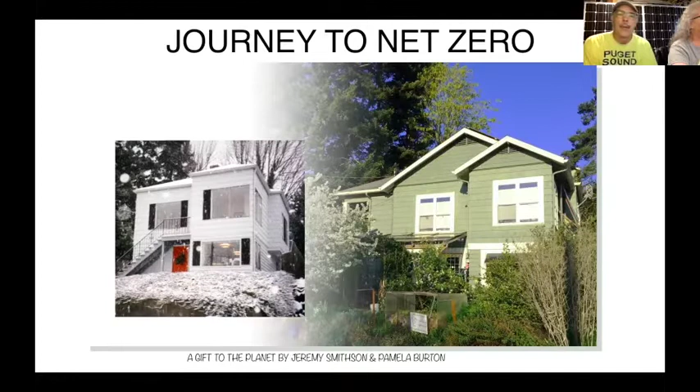We'll start with the house and what we did to it to make it more efficient, more comfortable, and just more livable. And we'll progress from there to the things around the house. So this picture shows on the left what the house looked like when we bought it, and on the right, what it looks like today. So you can see there's a few changes going on there, but they were really kind of consistent with the original design of the house.

So you can see on the upper left there in 1937, the house had big roof overhangs, and there was an open porch on the southwest side there. And by 1958, it looked quite a bit different. It had sidewall shingles, and the roof overhangs had been cut off, and that porch was enclosed. And when we got it, it pretty much looked the same, except it had some aluminum windows instead.

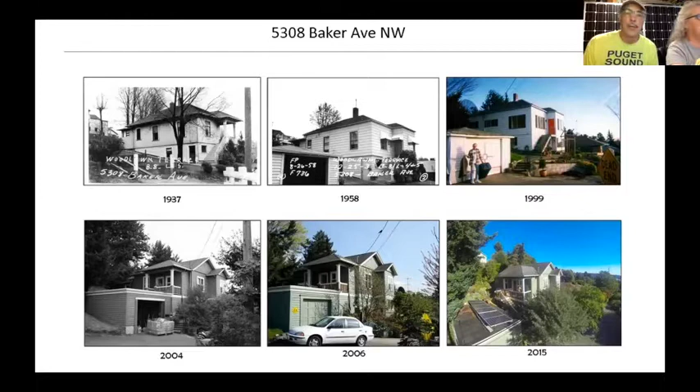So we took that porch design and recreated it on the north side of the house and did a small addition to give us a little more space. And then we also turned the roof into a gable roof to make room for solar panels. So here's another view of the progress of that. As you can see, it was over a number of years, but basically most of the work took place in 2 to 3 years. It was really 2 years, and I think we finally painted it in 2005 or something. Anyway, it's been a long project that we're still working on.

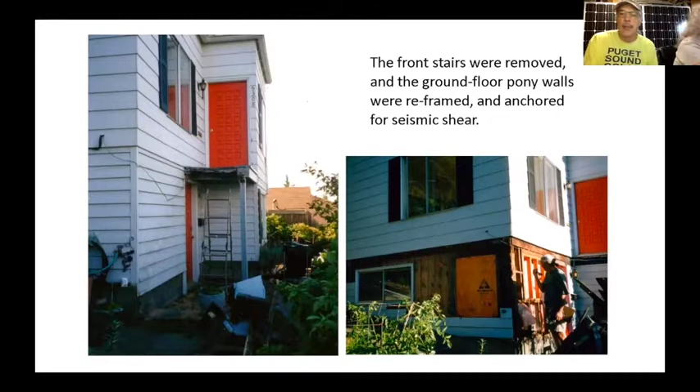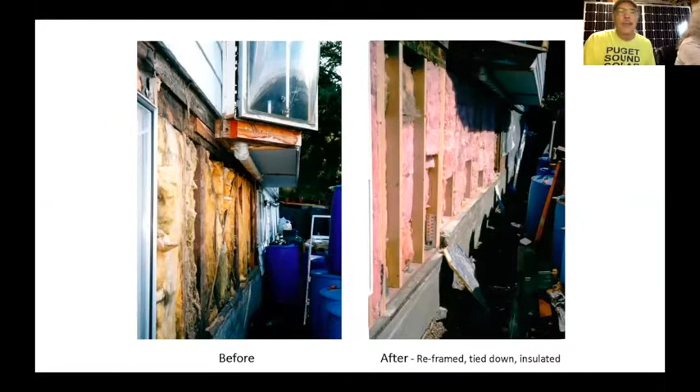The front stairs came off, and then we opened up the pony walls and discovered there wasn't a lot of framing down there. So those got reframed. On the left, you can see it was just some 6x6 posts and a bunch of random 2x4s. So we completely replaced that and tied it down with seismic anchors and insulated. That original insulation you can see on the left there, that yellow stuff, that was R7. So we actually kept that, but we added 2 layers of R13.

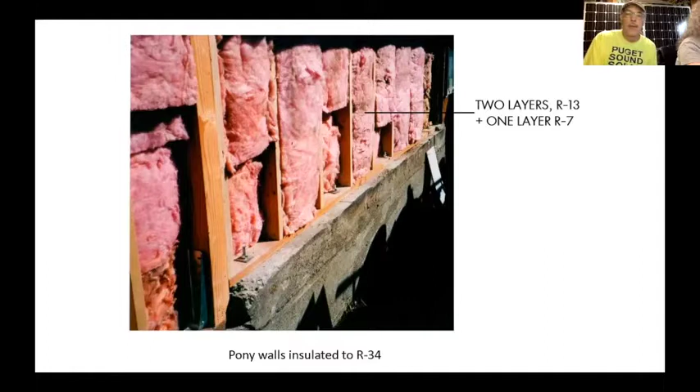And that was reclaimed insulation that we got at what was then Restore and is now Ballard Reuse, a really good resource for reclaimed building materials. So now we have R34 walls downstairs. Actually, I think they're R30 down here and R34 upstairs.

The aluminum windows, we replaced those with reclaimed vinyl windows that we got at Second Use Building Materials. They were a really good find because a lot of them were the same size, so we were able to use them in our existing window openings. And they were low E, argon filled, dual glazed units, so pretty nice windows.

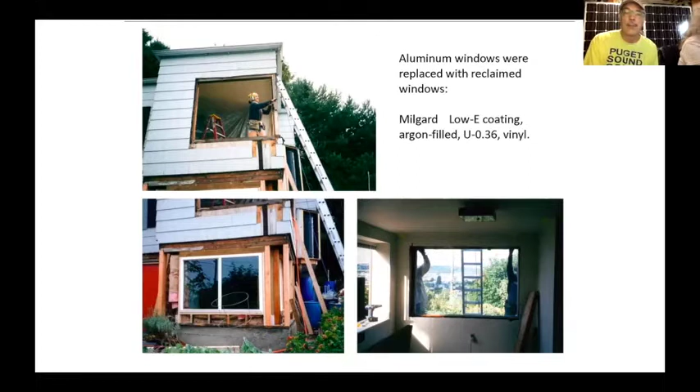The insulation that we did was unusual in that we did the 2x4 walls with cellulose, but then on the inside, right over the old plaster and lath, we put R19 foil-faced foam insulation, and that really increased the insulation value of the wall, but it also cut the thermal bridging at the studs and brought the corners in so that there's less heat leaking out at the corners. And in general, it just made a huge difference.

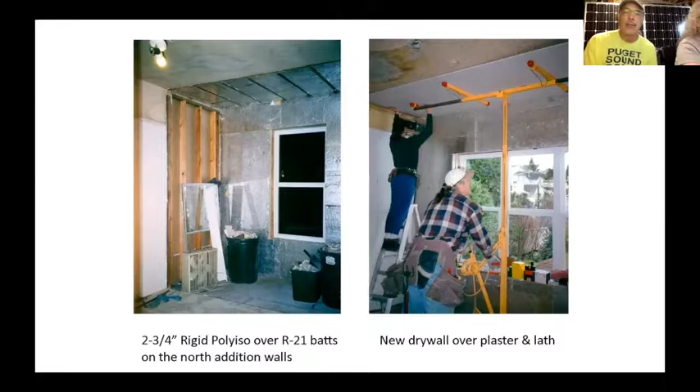On the north side, where we did the addition, you can see on the left picture here, we put that same insulation over R21 batts. So the north wall, for the most part, is R40. Upstairs in the attic, we did R57 with about 2 feet of cellulose. So here's detail on that foam insulation over the plaster and lath. We used 5-inch drywall screws to stitch all that in, and it worked great.

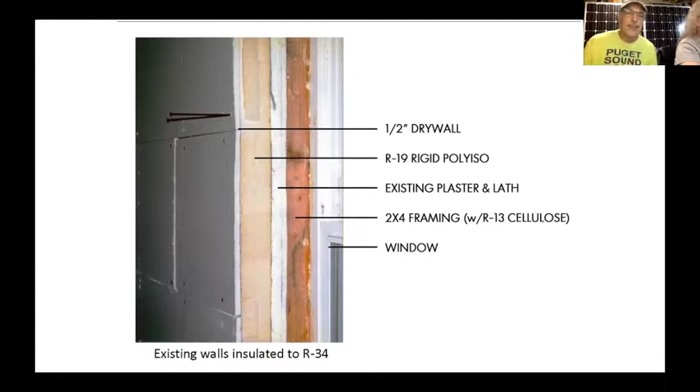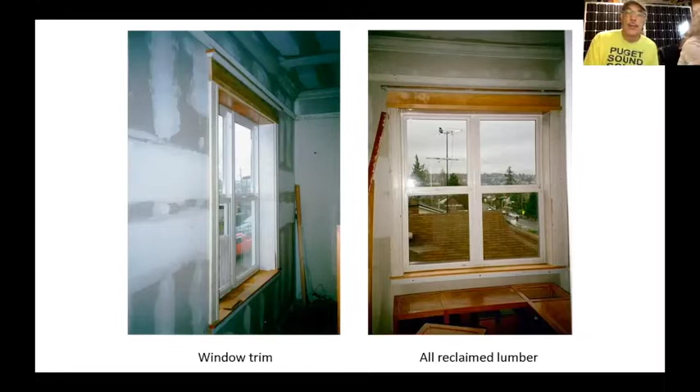The trim, this house had no trim in it when we bought it. Somebody had taken all the trim out. So we recreated what we think that 1908 window looked like. We were able to get period casing and some other parts like picture rail and cove molding. Most of that we got down at Restore. And we were able to fake the other parts to put together the lintel and the sill and make it look like it was an old window.

Here's some detail on the heating system. We have a complicated mechanical corner that includes the domestic hot water, including the solar input and the solar storage for that. And in addition to that, there's another water heating tank that is just for space heating. We reduced the heat load of the house by 2/3.

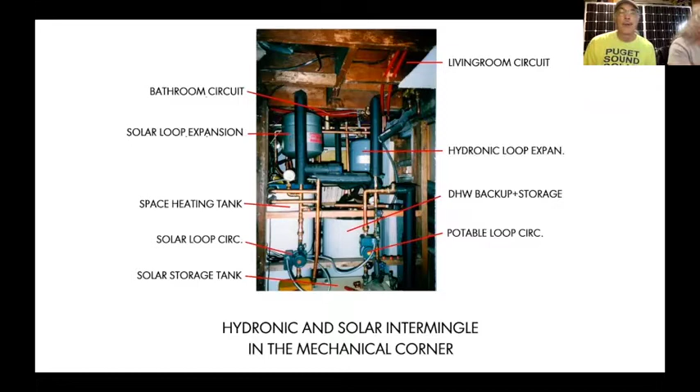So we were able to heat the entire house with just an electric water heater. And in 2013, we replaced that with a heat pump water heater, which cut the electric usage in half again. So really kind of a remarkable progression with the heating load.

Here's how we did the loops in the floor. Those are 1/2-inch PEX tubing that we just used conduit clips to screw up to the subfloor. The ceiling downstairs, we painted the back of the drywall flat black so it would absorb that radiation faster, because this system radiates both ways. And that's why there's so much tubing in each one of those joist cavities. Normally you'd only have maybe 2 tubes.

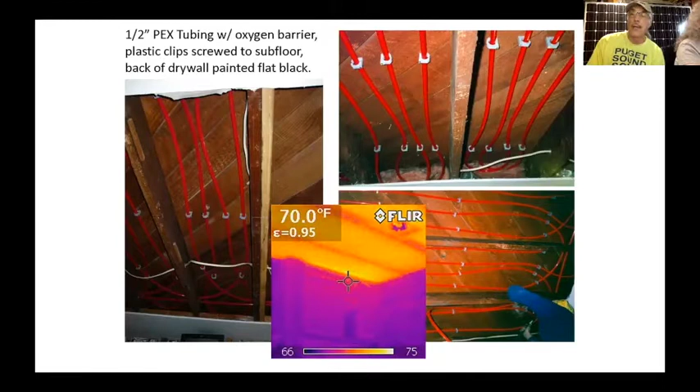But in this case, we have more heat flux where it's going up and down at the same time. It's remarkably efficient and comfortable now. And you can see that infrared picture in the center showing the basement ceiling and the walls. The walls are purple and the ceiling is yellow because the ceiling is producing a lot of heat. And that actually radiates to the floor. So the floor warms up due to the fact that the radiant loops are in the ceiling.

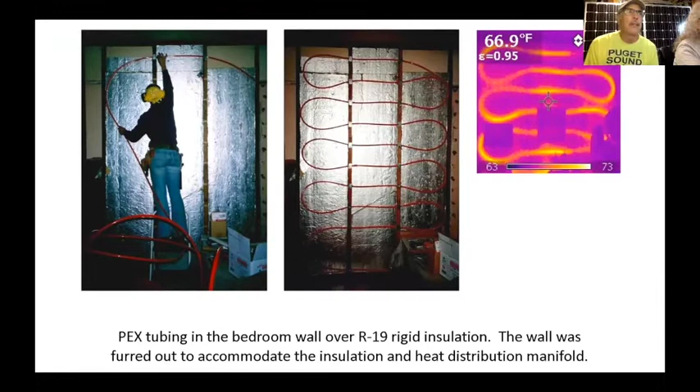Pretty cool. In the bedroom, we did loops in the wall because we didn't want to heat that part of the basement below the bedroom. And in this case, we put those loops over some of that foil-faced insulation so we don't cook the dining room. And that actually reflects the heat back into the bedroom really well. So this thing heats up instantly, and you can't really tell where the heat's coming from, but it's very comfortable.

We used a blower door to measure the leakage in the house. And the first time we did it, we were kind of surprised because there was a lot of leakage. And there were things that we just didn't think about when we did our remodel. So we went back and plugged up some of those places. And then we came back and did a blower door test again with a thermal camera and found leakage in places that we couldn't see.

So for instance, there was a cold line along the basement wall where you could see the cold air was coming in behind that wall where the pony wall meets the foundation. So things like that. There was a pocket door that was leaking air out of the pocket. And that's because it was coming in from a part of the ceiling that was open to the outside. So there were things we couldn't see that we found with that thermal camera. Amazing.

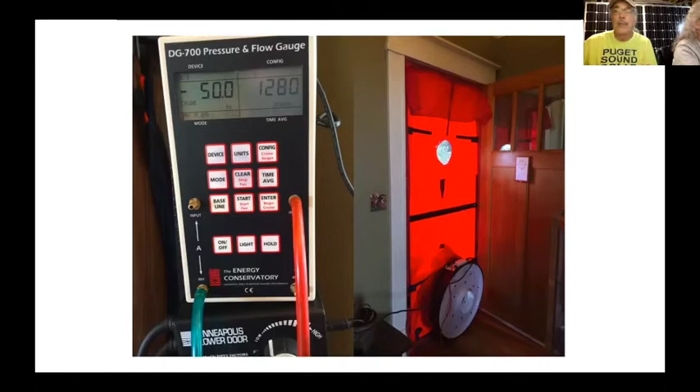And we got it to this point, which for this size house is right about where you want to have some mechanical ventilation. And actually our heat pump water heater provides that, oddly enough. But we tightened up the house, you can see how much tighter we got it.

This is a winter day, and the left is our house, and you can see the purple walls mean that there's not a lot of heat coming out of there. They're cold because they're just not receiving much from the inside. You can see the window frames and the glass is where the heat is really coming out of our house. Our next door neighbor's house, not so much. The walls and the windows, everything are radiating quite a bit more heat. So a good way to test to see how well we did our insulation work.

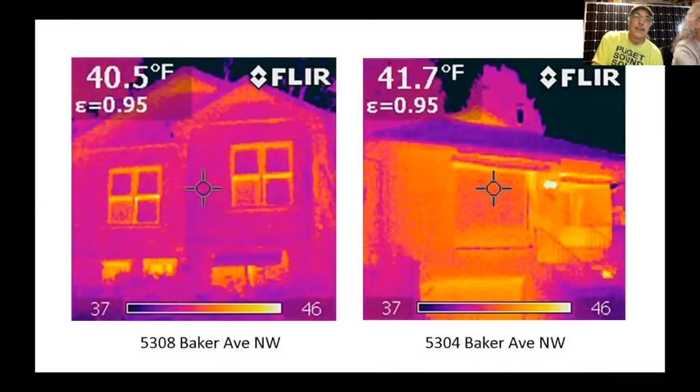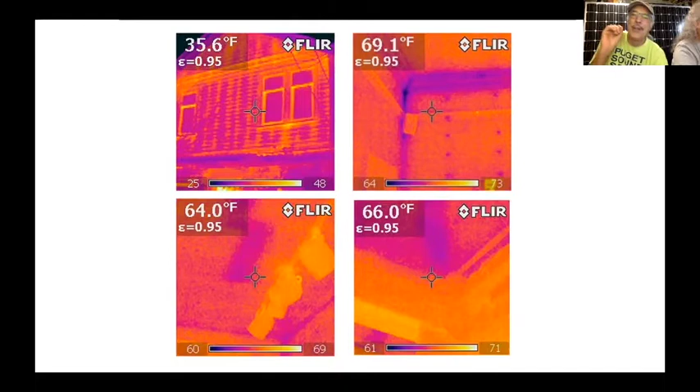Here's some other shots. This one upper left is another house in the neighborhood where you can really see that thing leaking. On the upper right, that's a picture of our dining room wall, and the dots are the screw heads, those 5-inch drywall screws I was telling you about, because that's the only thing that's really transferring heat through that wall. Plus in the corner where you typically get some leakage.

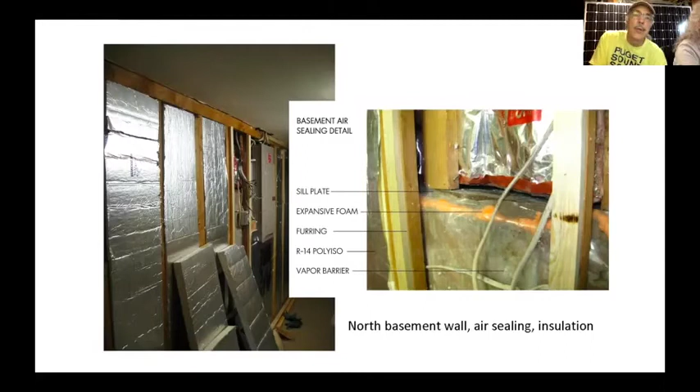And here's another detail of insulation we did downstairs. Air sealing with foam along the pony wall, and then we did vapor barrier. I think that was existing actually, and then we put 2-inch R14 polyiso board over that.

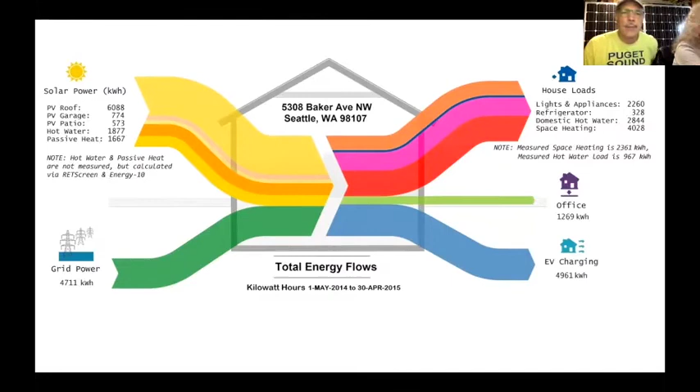Our hot water system makes about 1,800 kilowatt hours. That's based on the usage for a two-person household. And we get a lot of passive solar heating, and we've actually modeled that. When we did the design work on the house, we used a program that models the heat loss and the solar gain. And we ran the model with all the windows shaded, and it took 25% more energy to heat the house. So we're getting about 25% of our space heating from the sun coming through the windows, and that's that passive heat figure there.

So all of those yellow arrows really kind of neatly equal the red and purple and so forth on the other side where we're using that. And you can see those figures on the right. Those are all from the monitoring system we have, so we know where all that energy is going. And then down below, you've got the grid power coming in, but it's really only coming in to supply 2 electric cars. And hopefully someday we'll have enough production on the house to be able to make that up too.

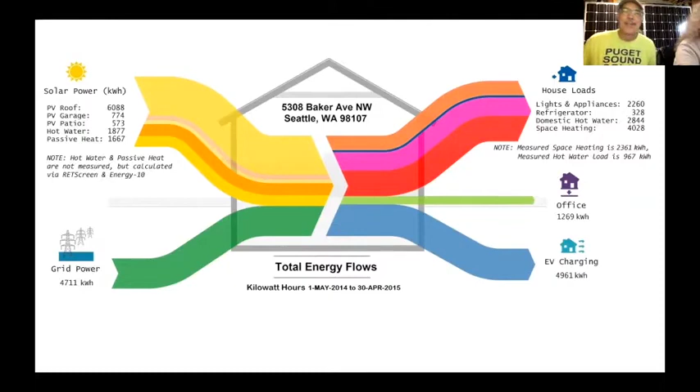But this is something you can do at your house. There are all these things that we've been doing here. There's probably some of those you can do.